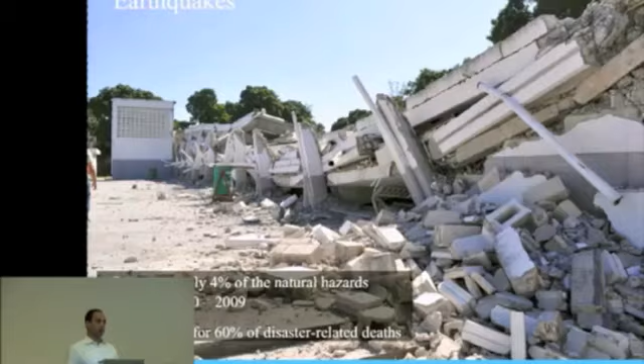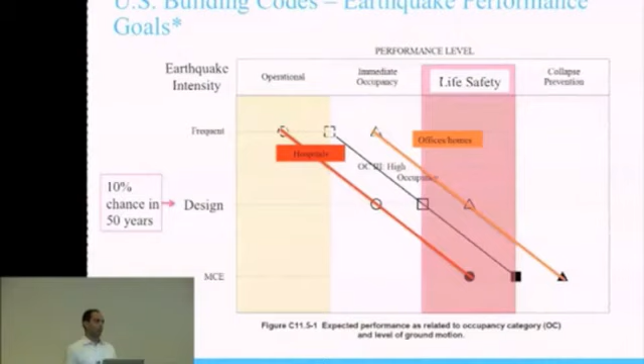So like I said, I'm going to concentrate on earthquakes. The natural fear from earthquakes is that we're going to lose our lives, and that's because you see pictures like this on television. Earthquakes represent about 4% of the natural hazards in the last decade, yet they account for 60% of the natural disaster-related deaths. That's really because earthquakes don't kill people, buildings do. We are contributing to this as engineers, right? And we have an opportunity to do better.

In the developing world, this is the issue, right? There's no codes, there's no oversight. This is a picture of a school that collapsed in Haiti. There's a lot of engineers focusing their efforts on this problem.

In the United States, on the other hand, we actually do a pretty good job of protecting life. I'm going to spend a couple minutes on this slide. Is there a pointer, or can I walk out there?

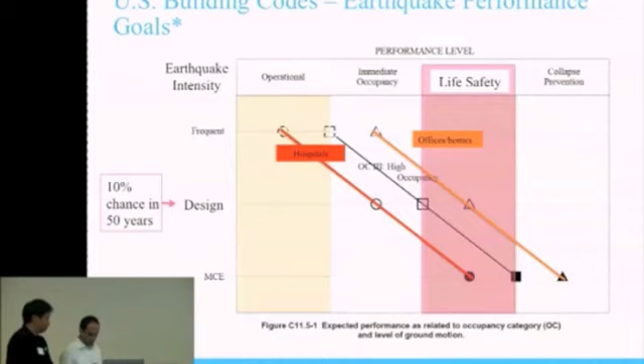Basically, on the left here we have an earthquake intensity level, and it ranges from frequent to design level to maximum considered earthquake. In the US, we design for the design level earthquake, which has a 10% chance of occurring in the next 50 years. This is analogous to the 500-year return period.

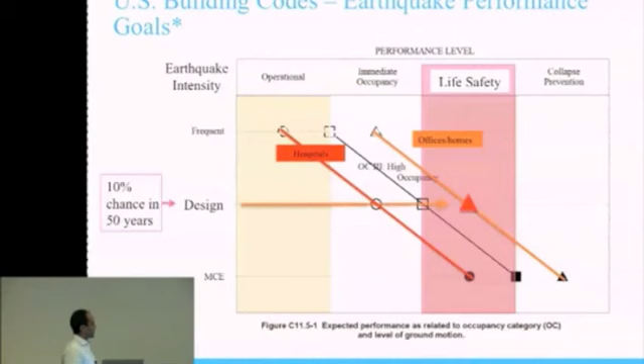If you read across the graph to figure out what the performance objectives are, and these are the performance objectives from operational to immediate occupancy to life safety to collapse prevention, we see that for a typical building, which is offices, homes, ordinary structures, the performance goal is life safety. And then for hospitals or other essential facilities, the performance objectives are slightly higher, so in this case, immediate occupancy.

So what does that mean? The Structural Engineers Association of California, I think, summed it up the best. What they say is that the code intent is that it is there primarily to safeguard against major structural failures and loss of life, not to limit damage or maintain function. That's an important point. So that's how we are designing our buildings right now in the United States. So when we say that our buildings are being designed for earthquake loads, we're designing so that they maintain life safety, but we don't really care that much about how damaged they'll be.

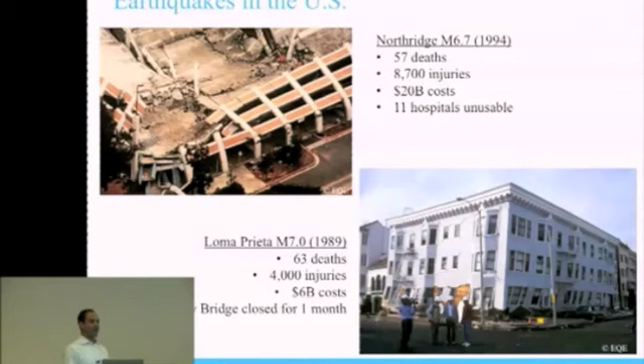So there haven't really been many design-level earthquakes in the United States to speak of. Actually, the last design-level earthquake was probably the 1906 earthquake in San Francisco. Recent earthquakes, or not so recent anymore, like the Northridge earthquake and the Loma Prieta earthquake were relatively minor in comparison. And they still resulted in some loss of life and some financial losses.

So this has contributed to a false sense of security, I believe, that we have survived these earthquakes, so in that case we're going to be okay. Our buildings were undamaged in the Loma Prieta earthquake. Actually, a lot of the homes were not damaged in most locations. I know people in San Francisco that think like this right now: we survived Loma Prieta, we'll be fine. That's just not the case.

This is a map showing a contour plot showing the earthquake intensity, the accelerations of the ground measured from the Loma Prieta earthquake. They're very small, actually. This is the predicted earthquake intensities measured for a magnitude 7.2 earthquake on the San Andreas Fault, which has a 50% chance of occurring in the next 30 years.

So this is an earthquake that's going to occur probably in our lifetime. And the intensity of this earthquake is about 3 to 4 times higher than the Loma Prieta earthquake. So the damage and loss associated with that earthquake is going to be much, much higher, and I'll show you that in a few more slides.

So probably the best example from which to glean some information about post-earthquake recovery and rebuilding is in Christchurch, New Zealand, which is a modern city with modern building codes. Actually, a lot of people think that the New Zealand building codes are better than the US building codes in some sense. I just had dinner with someone who just got back from Christchurch on a reconnaissance mission.

No, I don't want to do that, sorry. Oh, so let's go back.

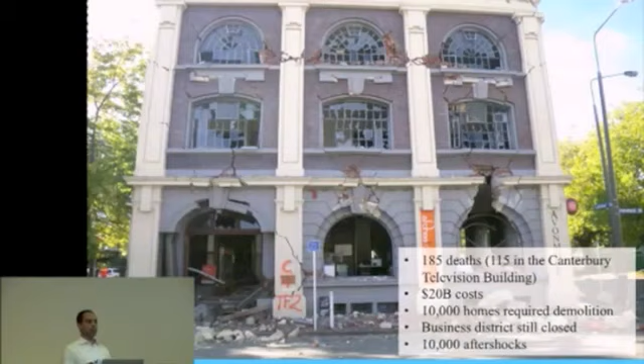She just got back from Christchurch, and she told me that the downtown business district is still closed a year and a half past when the earthquake hit. She said that the rebuilding of the businesses is happening in the suburbs, and she doesn't know if they're going to actually rebuild back downtown.

So this is a big problem. It might take years and years for Christchurch to recover, if it recovers at all. I found this quote, which I thought was interesting, from Roger Sutton, who's leading Christchurch's recovery efforts. He says, 'The level of destruction that we've got there is such that we've actually got an opportunity to do something really fresh. People are feeling optimistic now. What we had before was just a mishmash from historical accident, so to speak. Now we can think about it much more carefully and do something much, much better.'

But the point is, we shouldn't really have to wait for the next major earthquake to make these changes now. There's two things that we can do right now to reduce the earthquake risk in the United States. The first, I believe, is that we've got to demand higher performance objectives from our new buildings. That means maybe rewriting the codes or convincing owners that they should be designing better buildings right now. The second thing is we should be rebuilding now, retrofitting aging infrastructure. The goal really would be to eliminate losses for new buildings in a major earthquake, and to minimize the losses as much as possible for existing structures.

So I kind of mentioned already that the codes in the U.S. do a really good job of protecting lives. We're going for life safety performance objectives. So really, we're more vulnerable to the economic losses from the direct damage from earthquakes to the building and the building content, and the indirect losses from things that are much harder to measure, like business interruption, loss of community, loss of quality of life. So we may be doing a good job of protecting our lives, but what kind of life are we going to leave for the survivors?

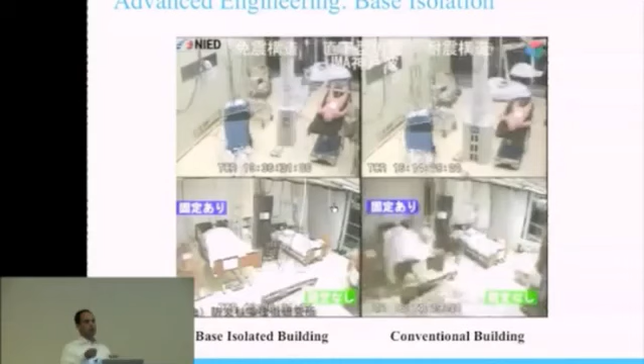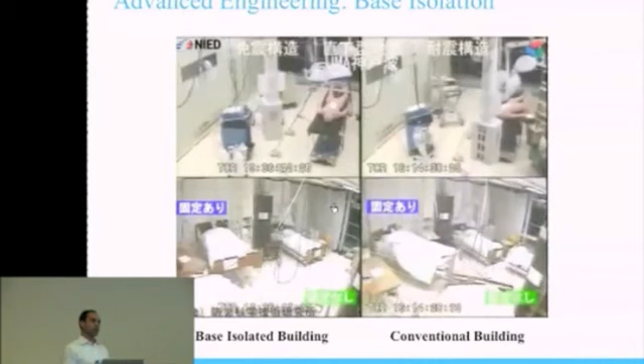This is a test that was done in Japan on a base isolated building. For those of you who don't know what a base isolated building is, it's basically a building that's supported on ball bearings, so it decouples the ground shaking from the building. So if the ground's shaking really hard, the building on top is just going to be swaying really slowly, which reduces the earthquake forces, accelerations, and displacements in the building considerably.

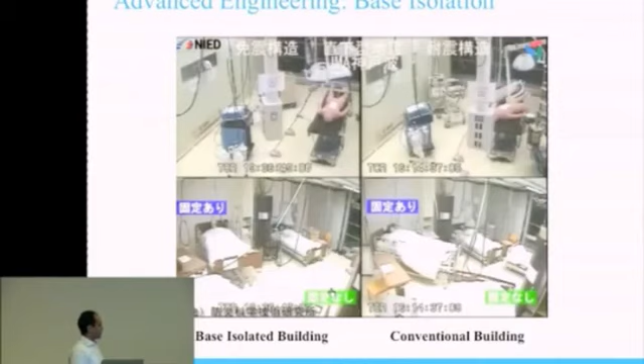On the left is the base isolated building. This is a hospital room. On the right is a code-designed hospital. It gives you a good idea of the level of shaking that's expected in a major earthquake and what could happen to the building content. So in Japan, base isolation is very widely used. The 1995 Kobe earthquake really shook that society, and they really highly value earthquake protection. I think there are thousands of buildings that are base isolated, compared to maybe a few hundred in the United States.

So how do you get people to build better the first time? Well, I think first you have to educate them. I don't think owners actually understand what they're getting from a code-designed building. The code-intended performance objectives don't align with public perception, with public expectations. Once they are educated, I think they can make a decision for themselves on what kind of resiliency goals they want. And they might want to build better to preserve their investment, reduce their insurance premiums.

Some of them are very interested in sustainable aspects, which I'll go into in a bit, and then the prevention of business interruption. There might be some additional incentives that a local jurisdiction could give. For example, in San Francisco, they give you some zoning flexibility, let's say building higher, if you build it better the first time. There's also a chance to reduce things like property taxes to convince owners to build better.

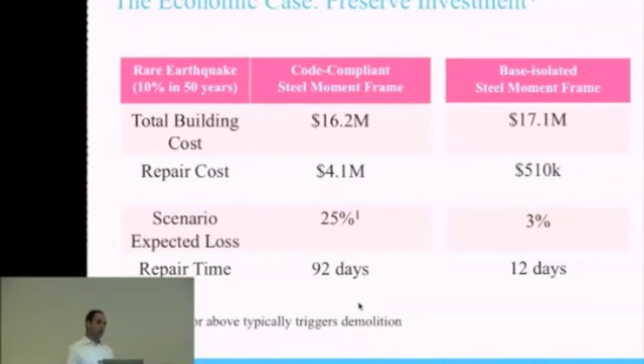The problem is, after a major earthquake, as we all know, it's going to be hard to line up financing, hard to find a contractor, and hard to find engineers who are going to sign and stamp drawings. So this 3 months is going to extend into 6 months, 9 months, or years.

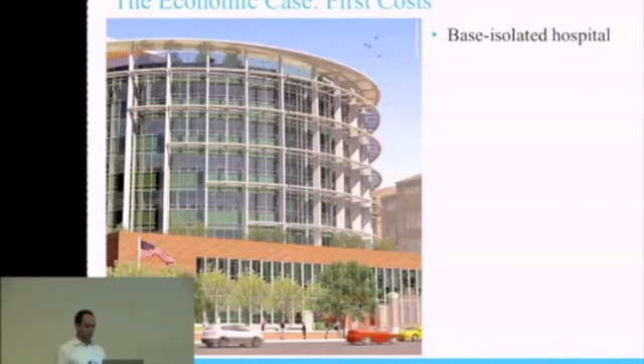On the other hand, if you base isolate that same structure, there are negligible financial losses, and the repair time gets reduced to about 2 weeks. That repair time is really for non-structural components, like cracking of partitions or a few ceiling tiles falling down. So you can resume normal business operations while still having people painting your walls. It's a much better solution to base isolate your building, for example, but there are other solutions out there—I'm just using base isolation as an example.

One of the major stumbling blocks is actually first cost. If you try to convince a building owner that they should build with higher performance objectives, they normally equate that with newer advanced technology, and they equate that with higher first cost. Well, we have found that that's simply not the case.

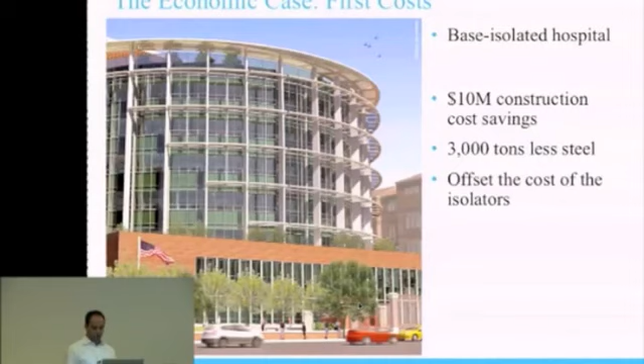This is a base isolated hospital in San Francisco that just finished construction a few days ago. In this case, the seismic forces get reduced so significantly that we're able to save about $10 million worth of steel from the superstructure. This more than offset the cost of the isolators themselves and everything that goes into the isolation system. So in many cases, it's actually cheaper to build better.

Even if it was more expensive to build it better, we need to put that in context of how much the overall project costs. Typically, an owner decides not to base isolate a building because it costs an extra 1% or 0.5% more to build with isolators. They really need to think about it in terms of the life cycle cost of the building.

The business interruption case is harder to measure, but I want to give an example of where building beyond code resulted in speedier recovery to business. This is a case of two different car manufacturers in Turkey, which were subjected to the 1999 Kocaeli earthquake—a report that one of my colleagues put together.

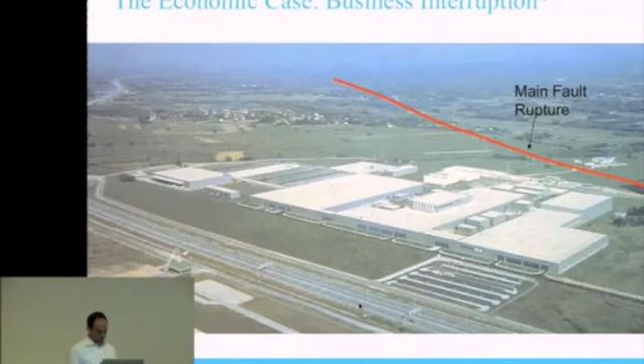One car manufacturer, Ford, an American company, appointed a local engineering firm to design their facility in Turkey in accordance with the local seismic code, satisfying the necessary requirements for life safety criteria. It did not collapse when the magnitude 7.6 earthquake struck in August '99, but there was considerable damage, particularly to non-structural elements, including equipment, which were not covered by the engineer's scope of work. Operations ceased and the plant was eventually closed down.

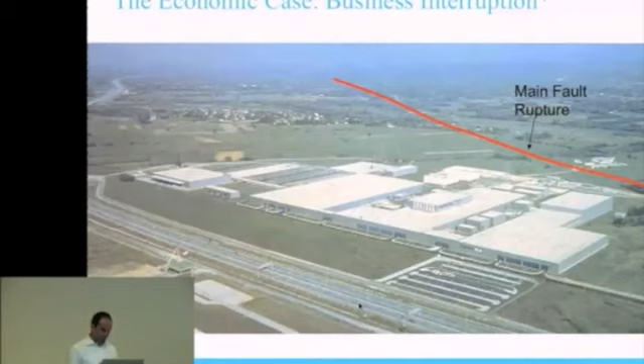In contrast, a Japanese manufacturer, who understood seismic risk much better, designed their facility—including the equipment and non-structural elements—to exceed code requirements and incur minimal damage in an earthquake. The facility performed as expected, and operations could have resumed immediately. However, the factory remained closed for several weeks, as most of the workforce lived in housing which collapsed or was badly damaged, causing deaths and injuries. Yet after a short while, the employees were able to return to work and begin to rebuild their lives, helped by the fact that the factory was still able to operate and they had retained their jobs.

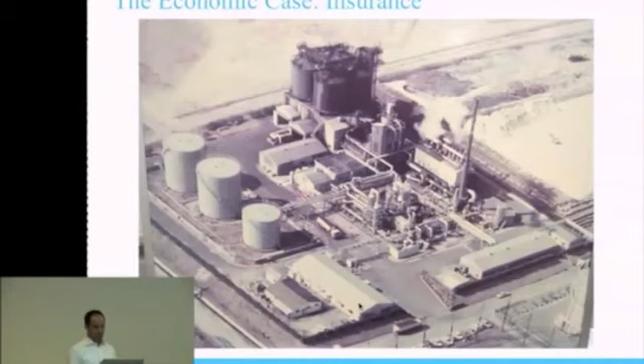There's also a case for insurance. The benefits of earthquake resilience on insurance costs are rarely realized. We've done studies showing that improvements in earthquake resilience of, for example, a global manufacturing facility could reduce earthquake premiums. In this case, it reduced premiums by $460,000 a year, and cut the level of insurance from 80 million down to 40 million, just from doing site-specific technical resilience analysis on this site.

Are there any architects in the room? A few. So, right now the trend is sustainability.

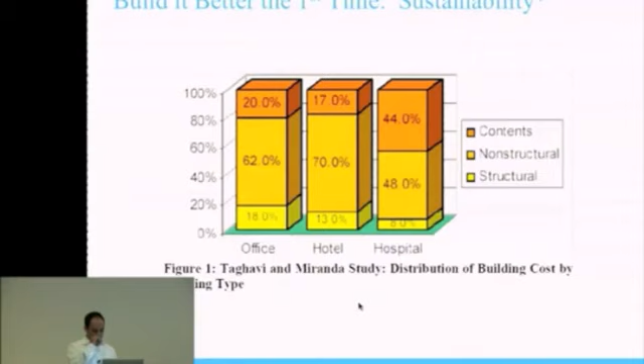I mentioned before, 80% or more of the total cost of a building is in the non-structural components and contents. For sustainable building owners, they throw a lot of money at highly sustainable materials and high-performance architectural and mechanical systems. But why would you put those kinds of systems in a code-designed building which will just be severely damaged after an earthquake? All those components you invested a lot of money in are going to go into a landfill. Is that really the way we should be building highly sustainable buildings? We really need to think about resilience and sustainability in the same light.

There's really a lot of reasons why a building owner may decide to build it better the first time, beyond code performance objectives. This is an earthquake resiliency rating system we've been developing for the past six months. It's a way of communicating to an owner what they're getting from a code-designed building, and what they could get once they decide, based on their risk tolerance, what kind of resiliency goals they want.

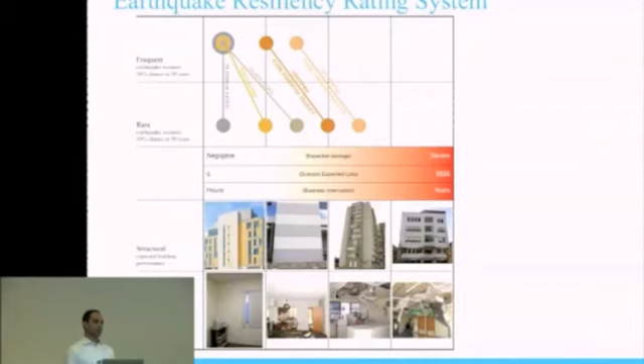For example, this bar says a code-rated building. For a design-level earthquake, the code-rated building gives us significant damage, significant financial loss, and significant business interruption. This is that building in Chile I was showing you. So we can educate the owner simply by telling them what they're getting with a code minimum design.

We could also say, hey, we can get you something much better. This is a platinum rated building, gold rated, silver rated. For a platinum rated building, the losses are negligible. We actually say that for a platinum rated building, financial losses should be about 2% or less. These are terms that an owner can understand: dollars and downtime.

As engineers, we've been terrible at communicating this before. We always used to talk in terms of life safety or immediate occupancy, and no one really understands what that means. How am I doing on time?

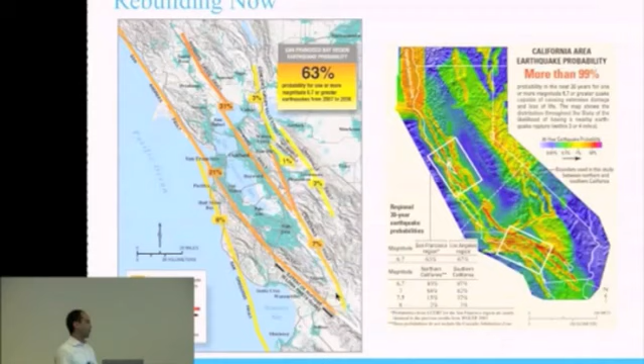Okay, so shifting gears just a little bit now into rebuilding. I wanted to focus on San Francisco because I think San Francisco has done a really good job of increasing their resilience goals and retrofitting existing buildings to increase the resilience of the city. San Francisco sits between two major faults, the San Andreas to the west and the Hayward Fault. The Hayward Fault actually runs through Oakland and Berkeley.

The USGS predicts that a magnitude 6.7 earthquake will occur. There's a 63% chance of a magnitude 6.7 earthquake or greater in the next 30 years. There's actually a 50% chance, as I told you before, of a magnitude 7.2 earthquake or above occurring in the next 30 years. So this is going to happen.

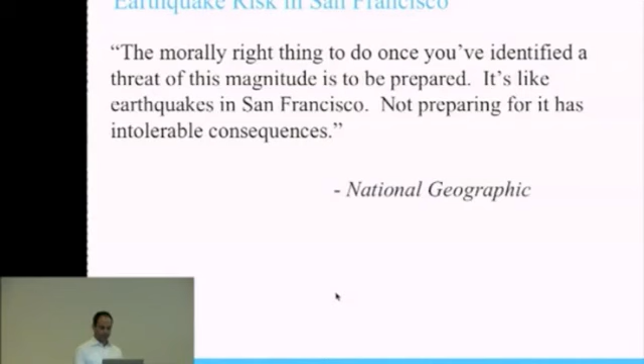This is a quote I found from National Geographic: the morally right thing to do once you've identified a threat of this magnitude is to be prepared. It's like earthquakes in San Francisco - not preparing for it has intolerable consequences. This is from an article I was reading about solar flares, which apparently we should all be very worried about. It's pretty scary.

So the implication here is that we're prepared in San Francisco, right? We've identified the threats. We tell everyone there's a magnitude 7.2 coming, and we've actually prepared. The truth is we're not prepared, and here's the proof.

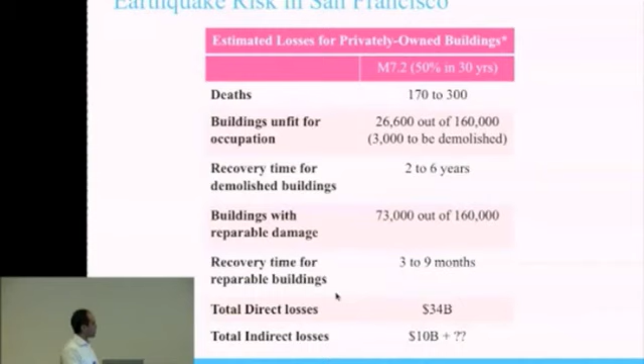This is a study done by the Applied Technology Council in conjunction with the Community Action Plan for Seismic Safety for San Francisco, or CAPS. This is the magnitude 7.2 earthquake, 50% chance of occurring in 30 years. That's a 43-year return period earthquake. So it's a good chance of occurring in our lifetime.

Basically this is showing considerable direct losses, 34 billion in this case, and they can't even measure the indirect losses. It's really impossible to measure the indirect losses. They say 10 billion plus, caveat, caveat, caveat - we can't measure these other things like business interruption, people leaving the city, et cetera. So this is pretty scary.

This is what will happen if we don't take any action. I think in the report it said that it would take San Francisco about 10 years to rebuild from this earthquake.

The CAPS report actually didn't explicitly assess the damage to tall buildings. So we actually recently...

Did I do something? Catastrophe.

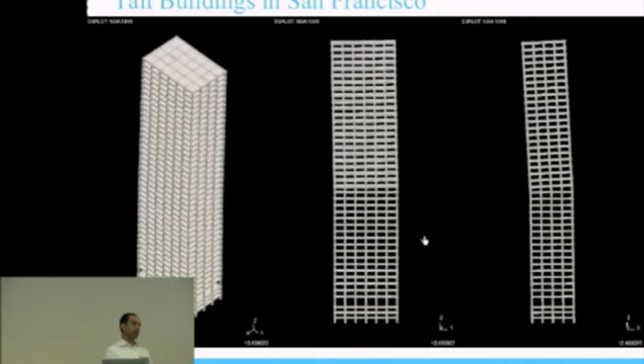The problem for tall buildings in Seattle due to that earthquake is very significant, because it will probably shake the Seattle basin for about 5 minutes. For tall buildings, especially steel—well, concrete too—if you get 5 minutes of shaking, you actually get fatigue of your connections, which makes it even worse. They predicted a lot of collapses.

There's a study by Tom Heaton at Caltech that did that. I can refer you to that report. Okay, thank you.

So we did some studies on these tall buildings, subjecting them to major earthquakes to see what would happen. We ran several analyses, and here is one example of one of the scenarios.

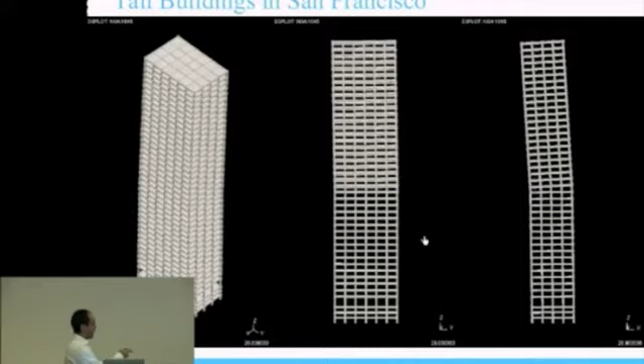In this case, the building doesn't collapse. The building, though, has a significant permanent tilt—we're not magnifying that, you can actually see it. That's about a 5% tilt. This is indicative of what would happen with most of the tall buildings in San Francisco under a major earthquake, so you've got about 5% permanent drift.

You cannot reoccupy that, you can't rebuild it—you'd actually have to tear the building down. Imagine if even 1, 2, or 3 of these buildings would have to be torn down. There were also scenarios we ran where the building actually did collapse. Like I said before, one building collapsed in San Francisco, and it's densely clustered downtown. How do you rebuild from that?

We've really got to start looking at retrofit strategies for these buildings. The good thing is we are looking at retrofit strategies—we're going to be doing work over the next 30 years. CAPS has a 30-year implementation plan, a policy roadmap. This isn't an overnight solution; it's going to take decades.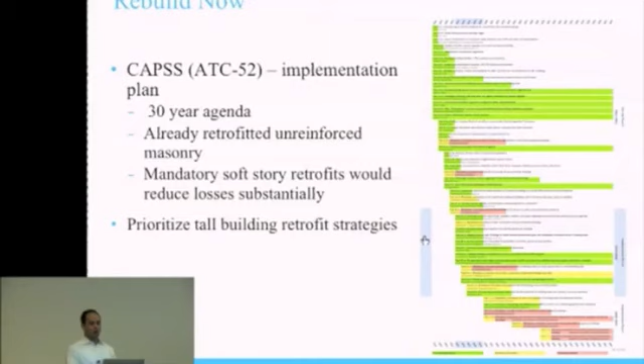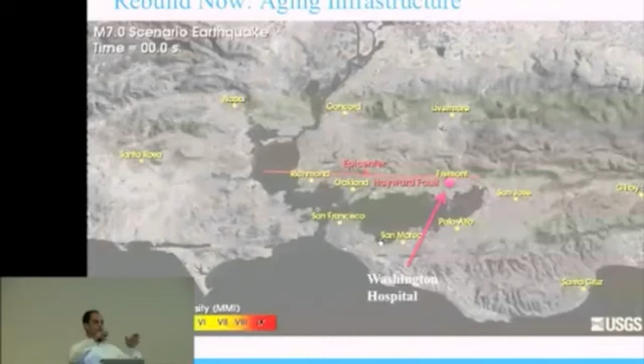They've already retrofitted almost all of the most vulnerable buildings in San Francisco, the unreinforced masonry buildings—there's about 1,600 of those. And there's going to be mandatory retrofits to wood frame buildings that have soft stories. Soft story buildings, for those who don't know, are multi-unit apartments built over a garage, and the garage has no strength on that open face.

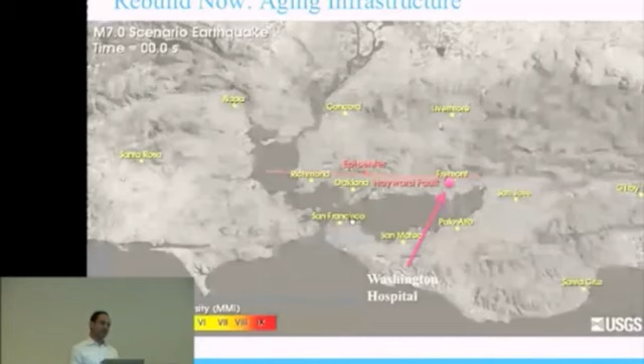And so basically the building would just collapse on itself on top of the garage. So there's going to be mandatory retrofits, which would substantially reduce the losses that I showed in the slide a couple slides ago. And based on the research we just did, we're going to prioritize our tall building retrofit strategies.

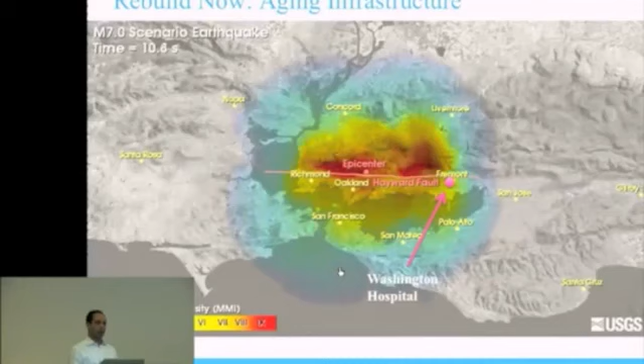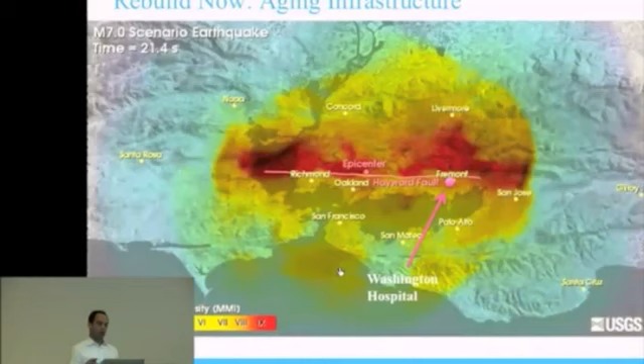I met with the director of the Pacific Earthquake Engineering Research Center a couple of weeks ago, and they're going to be putting a lot of money into looking at this problem. And the Building Owners and Managers Association is also very interested. I've just got two more slides here, three more slides.

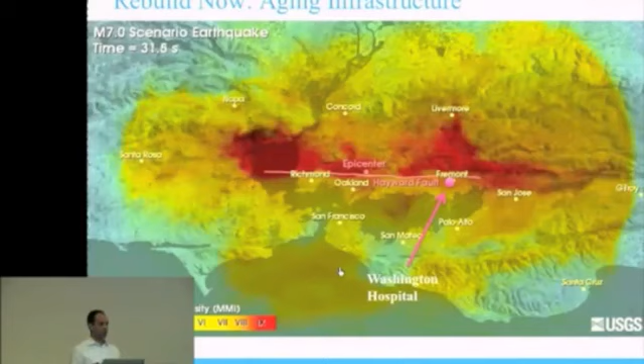So let me give you an example of a building that was retrofitted, before and after. This is the case of the Washington Hospital. It's built in Fremont, right next to the Hayward Fault. The Hayward Fault is capable of producing a magnitude 7 earthquake, and this is what the waves might look like. The magnitude 7 earthquake hits Hayward every 140 years. It's been 144 years since the last Hayward earthquake.

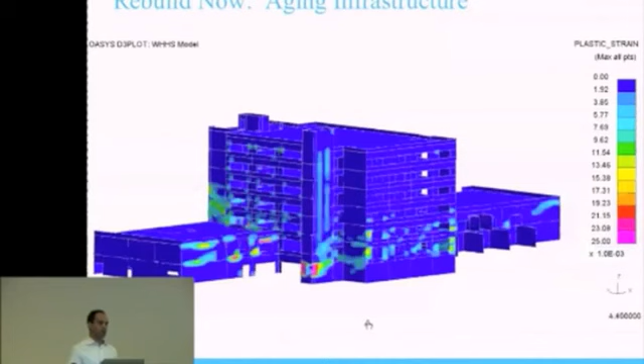So there's a lot of buildings, like I was saying, in San Francisco that have been retrofitted, the unreinforced masonry ones. This is an unreinforced concrete building - I mean, it's lightly reinforced, let's put it that way, it's not unreinforced. This is a hospital that's in operation. Actually, I should have taken the name away, but anyways, this is what it looks like subjected to that earthquake.

So the analysis actually can't even go that far because basically this is collapsed. It's collapsed at the second story. And this is not unexpected - we expected this to happen. It's a lightly reinforced building.

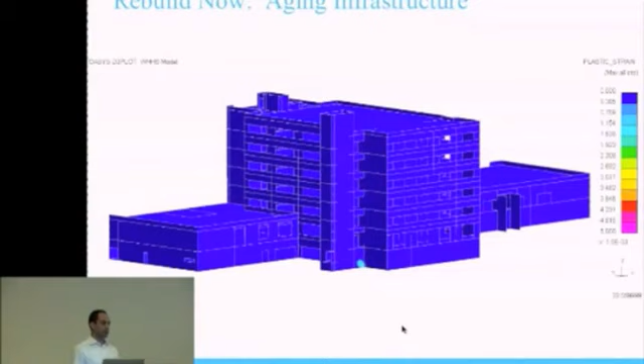So what happens if you base isolate it? This strategy is basically cutting the foundation at the base and inserting the base isolators. This is the same strategy that was used on the San Francisco City Hall and many other buildings actually - the Utah State Building, I think. Same earthquake. It basically performed perfectly, no damage.

So that's the kind of technology we have today to do better, right? Retrofit our aging infrastructure. So we should be rebuilding this type of infrastructure now. So in conclusion, in the developing world, the problem isn't easy, but at least we've identified what the problem is. There's no codes, there's no oversight, the construction methods are pretty poor. In developed countries such as ours, I don't think the code goes far enough to protect our investment. So we really need to try and change that way of thinking. So let's invest now to reduce our rebuilding and recovery efforts at a later date.